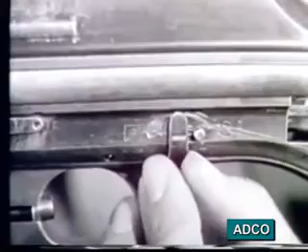That's what happens when the change lever is set at full rate. When it's turned to S, or the slow rate, however, the toe of the connector has more of the slot in the change lever to work in.

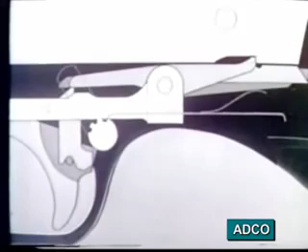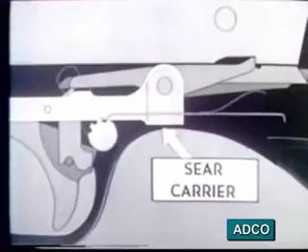Watch how the connector is cammed forward, contacting the cammed surface of the sear carrier when the trigger is pulled. With the sear disengaged, the connector raises the forward end of the stop lever and holds it there.

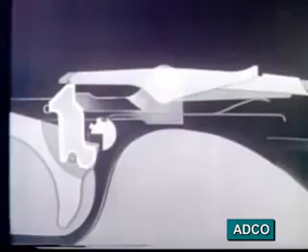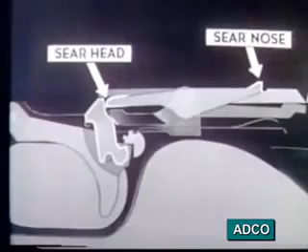Since the sear head is disengaged, the sear nose can now rise, forced up by the sear spring, and engage in the sear notch on the bottom of the slide as it starts forward.

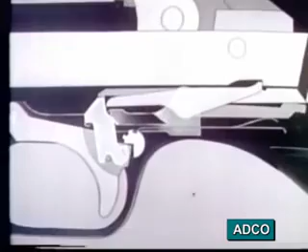At this point, we'll add the actuator. Now, when the slide hits the sear release, it forces the actuator to the rear, compressing the actuator spring. Then the slide moves forward and engages the sear nose.

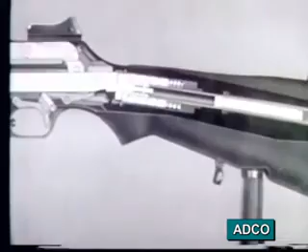Let's get a closer look at the sear cam and the sear release. The actuator now comes forward, forcing the sear release out of the buffer head. The stop lever being depressed, the sear release contacts the camming surface on the sear and releases the slide.

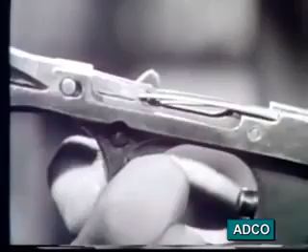With the trigger mechanism removed, we can see what happens now as we release the trigger. The stop lever spring returns the stop lever to normal position. The center leaf of the sear spring provides tension for the trigger and connector, while the two outside leaves give tension to the sear.

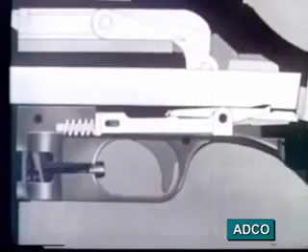The counter-recoil spring absorbs the shock when the slide engages the sear.

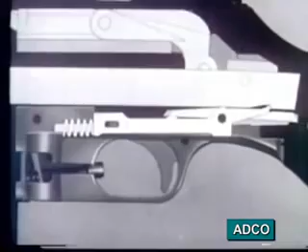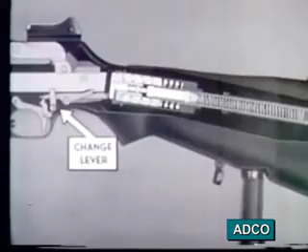All right, let's watch the trigger action once more. First, at full rate. Then, slow rate.

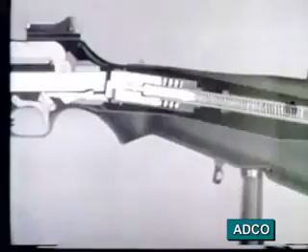There you have it. Know the firing cycle thoroughly. Keep the gun in fighting shape.